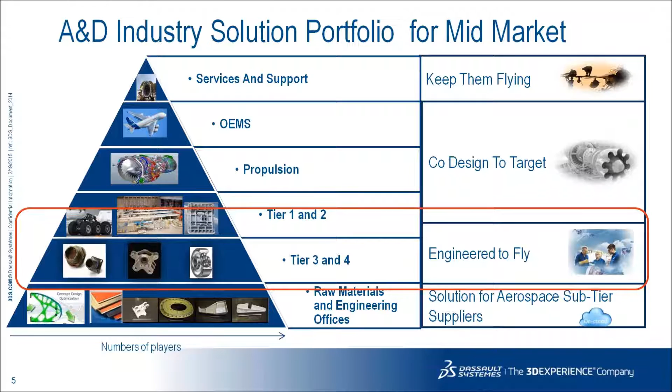To set the premise of where we feel this solution fits, it's really some of the Tier 1 and Tier 2 suppliers, and some of the Tier 3 and Tier 4, and even sometimes a little bit beyond that, depending on the interaction that you have with those tiers. That's our sweet spot that this solution has been developed for.

So why did we go and develop that? It's to address some of the technical challenges we're seeing as trends in the industry: basically more complex parts, going from metallic parts to composites, or from systems that are just pipes down to fluidics and electronics involved, or more importantly, even delivering integrated systems. It's not just piece parts and components anymore, but integrated solutions with sensors and reactions and various different components in that capacity, as well as business pressure on these tiers or suppliers into the supply chain about pressures in the global business market.

There's consolidation, there's mergers and acquisitions that are trending in our industry. There's the attitude of risk sharing from the OEMs - it's not just satisfactory anymore to simply participate from a transactional relationship; they actually want you to be a risk-sharing partner, and then be able to survive the ups and downs of the trends, managing the rate and demands on production, being able to take advantage of that when the opportunity should arise.

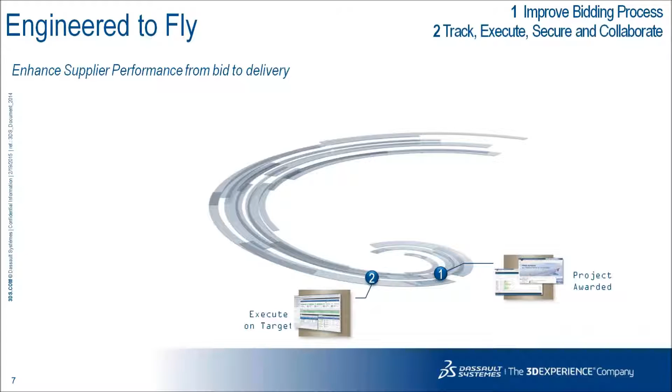So again, describing this a little bit more, how do we do that? One, we're going to work on improving the bidding process - standardizing on the bidding process, how to react to the bidding process, and that's part of this solution. Also executing on target, so on time and on budget for our projects, as well as integrated value streams, whether it's composites or machine components or systems and equipment.

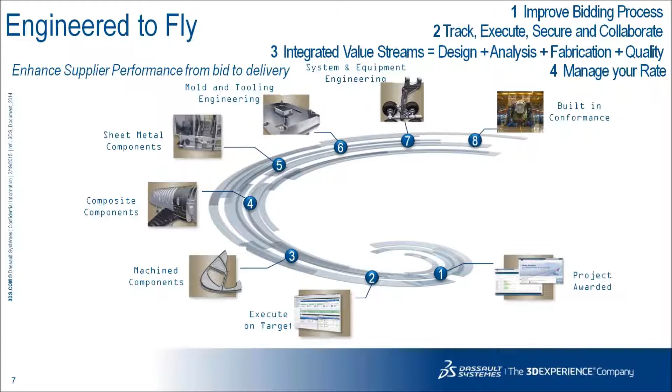And then finally, the validation of this so that you are traceable and auditable and have that built-in conformance at the end. So the solution is designed to basically cover those specific areas.

So uniquely, what does that offer? When we talk about items like digital continuity, what we're talking about is all working on the same architecture, having the same access to that data from design through manufacturing, so that we can run the proper simulations and understand the impact results.

Driven and controlled execution, where we're providing the standardized method for the routes as well as the traceability for your OEMs when we're executing on the project, as well as the operational efficiency gains we're promoting, which is really the reuse of RFP results, various risks and opportunities, and a templatized approach where we're not reinventing the wheel each time. We're using standardized templates to help accelerate our overall efficiency.

So with that, I will present a demo synopsis or scenario here that's really in 4 different stages, and we'll try to break that up a little bit so it's not just one continuous flow, so you understand these various areas and impacts throughout the presentation.

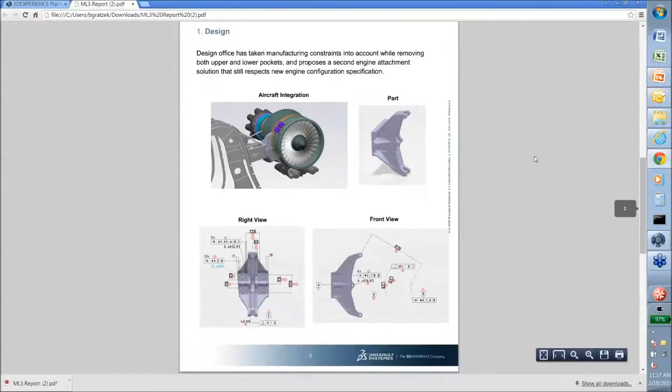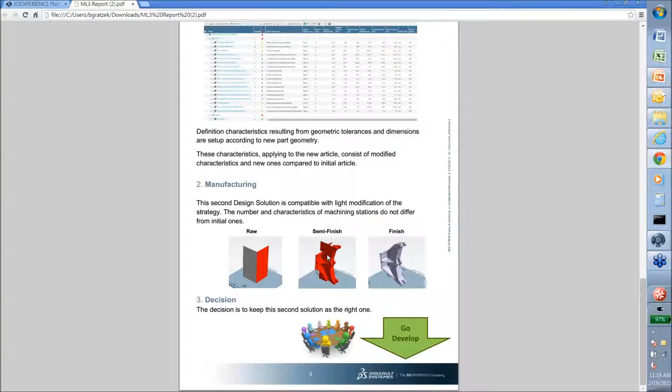So I'm looking under the folder that is the RFP requirements, and you'll notice that I have a written specification here. Let's go ahead and take a look at what that specification is. It talks about the engine attachment, the part that we're responsible for, the design, a couple different views, the tasks associated to it, and the different options for manufacturing that we have. This is part of the RFP. They want to change the mounting design on this particular part, and we're going to go ahead and investigate that.

So potentially we've got something we need to respond to in an RFP, and I could email that out and send it throughout the organization and have it get lost, or maybe not attended to, or maybe not tracked. But what we're going to do is show the 3D Experience and Engineered to Fly approach to how we respond to an RFP.

So as a program manager, I've made this available in this folder, and the manufacturing engineer has been notified through the workflow that they need to participate on that particular RFP. So I'm going to switch hats and switch roles, and I'm going to go from a project manager now to a manufacturing engineer.

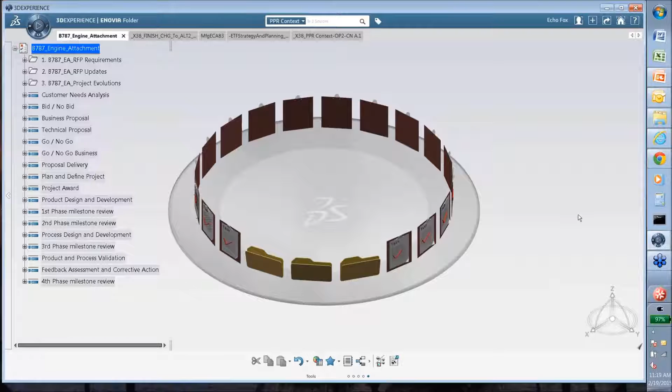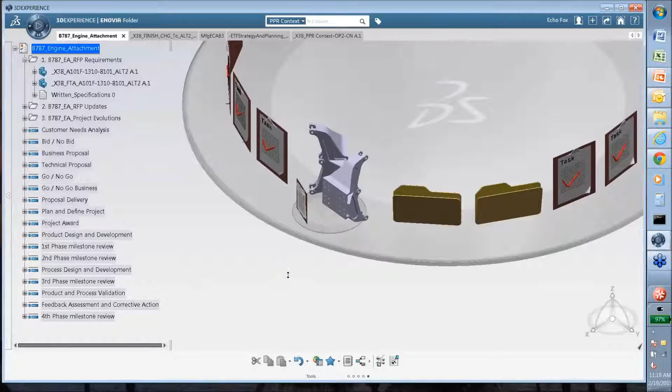That exact same view that I just had in the web browser with the 3D Experience is now mimicked here on the thick client for the manufacturing engineer, and in fact it's exactly the same information. I've got the project information, I've got the folders, I've got each stage gate and review information per that stage gate. So I am able to see visually in 3D what was there in the web as 2D information.

So I'm participating in that project and RFP plan directly here. We'll take a look at the

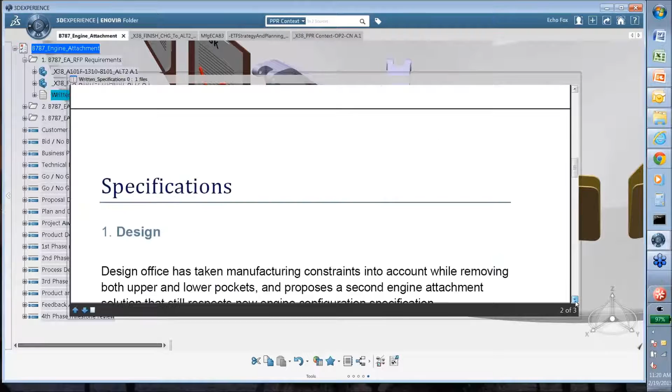requirements again. It's exactly the same document, one that we just reviewed from the web. So the same kind of look and feel is present both in the thick client as well as the thin client.

The compass is up here. So we're trying to get the synergy going between these two environments or interfaces.

So as I've looked at that document, I understand what I'm tasked with. I'm going to review the information that's here and take a look at the actual part that is in reference.

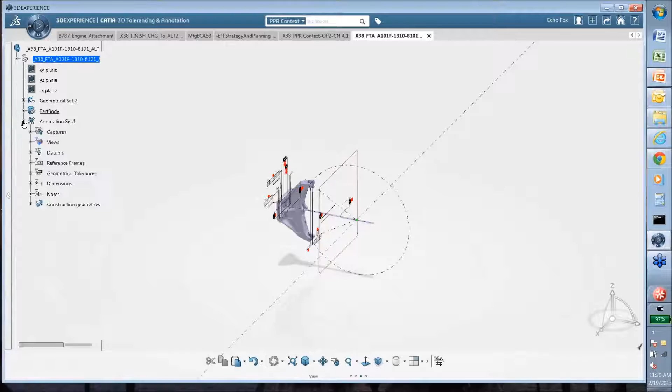And this, even though we interact with multiple CAD systems, I'm going to be working in Catia on the 3D experience. So this is the 3D experience and CAD or Catia at this point.

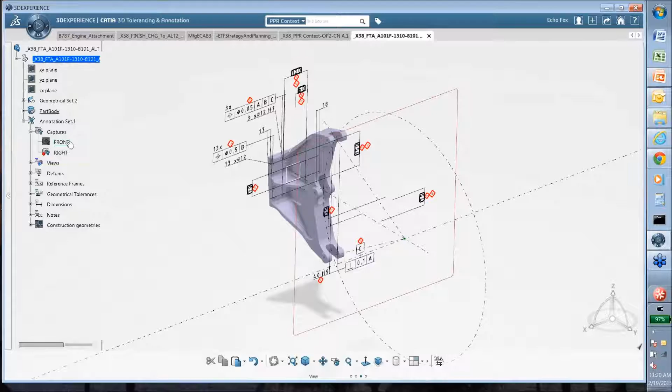So the same functionality, if you're used to this in V5, still exists. The displays of captures, which snaps us to a specific projected view and orientation, as well as displaying the various different tolerances that are there.

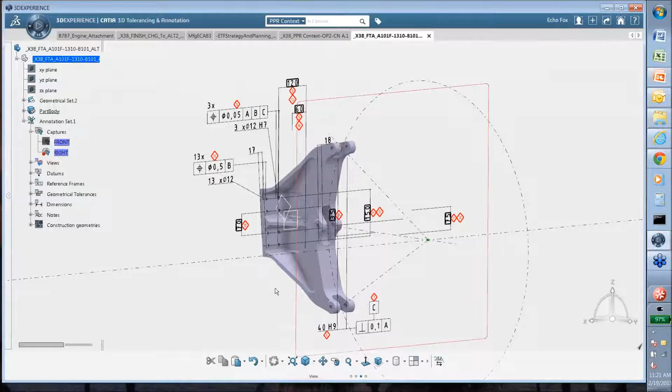This is very prevalent now in the aerospace industry to provide model-based definition where all the specs, the materials, the handling, the call-out is all identified directly on that particular part.

I'll also go explore just the geometry now of that part without the annotations. And what I'm really going to be looking for is anything that is similar to this part.

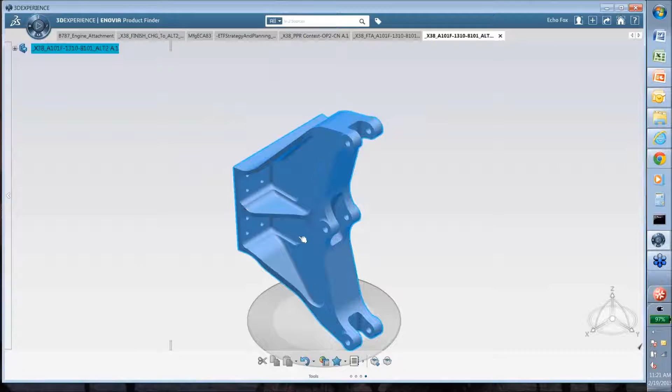So I'm the manufacturing engineer. The premise is going that I need to find out everything I can about this part. I'm looking at the information that has been provided, as well as I'm going to perform a similar search.

So I'm going to reuse any entries or items that I find that are valid inside my database to find out past projects, to find out components that may be relevant to what it is that I'm trying to accomplish.

So at any time I can go take a look at the properties of that particular item, find out the description or any kind of project that it was on, or if I want to, I can explore this with its parents, so I can find out what projects, what RFPs it has participated in the past, what machining operations were used on this particular part.

So as I go through, I'm trying to reuse the information within my database itself so that I can gain that efficiency when I'm responding to this RFP.

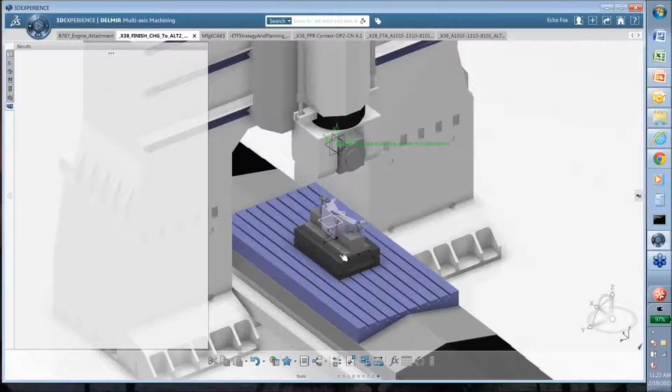So we'll take a look at the actual machining of the part as it stands now and investigate this a little bit further. So here's our part that is in the machining center, and it's our responsibility to find out everything that we can about this.

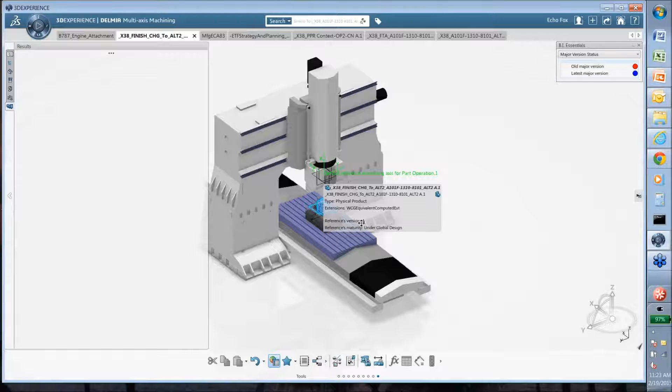And we take a look at that this part itself is actually an older revision. So we've got a revision A in there. With the B.I. Essentials overlay, I can find out very easily which part it is that is out of date.

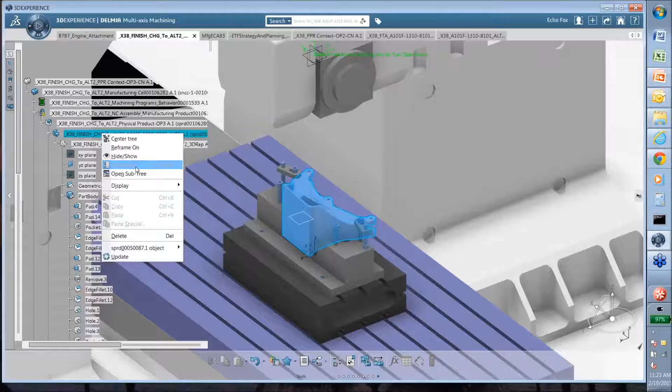The same items of capability that you're used to inside of Catia, where we can look at properties and center the graph, etc., exist inside of here. And I'm investigating this part to really find out what versions are available on this part.

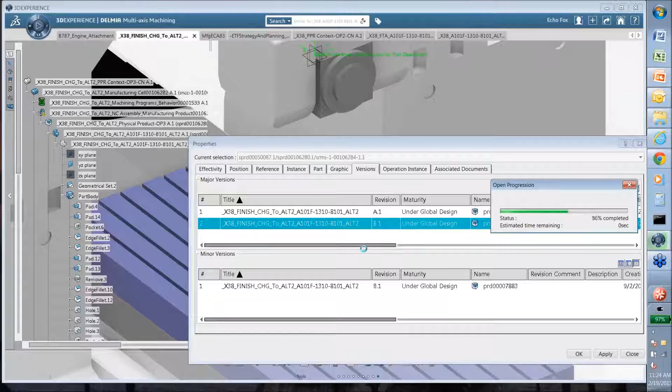There could be multiple versions on here. In this case, there's a version A and a version B. Let's go explore. Actually, let's just open this up and take a look at version B and try to determine exactly what's different between these two.

So I'm in investigation mode, manufacturing engineer, trying to figure out the differences between version 1 and version 2, or in this case version A and version B. I'm going to do a design review on this, and it's much like an assembly.

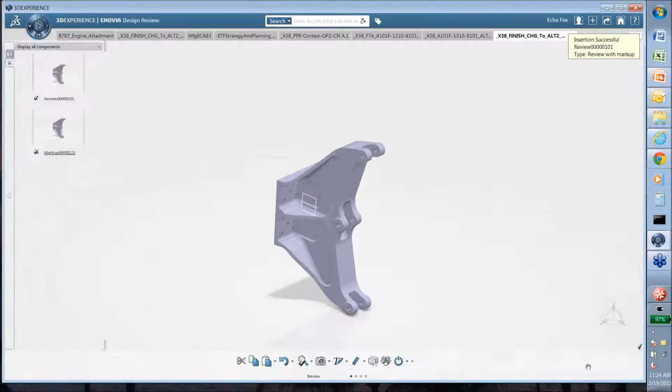We bring that part into the actual review, and then we can do various different tasks on it. And one of those tasks is really to compare it to anything, but the prior version would be nice to know.

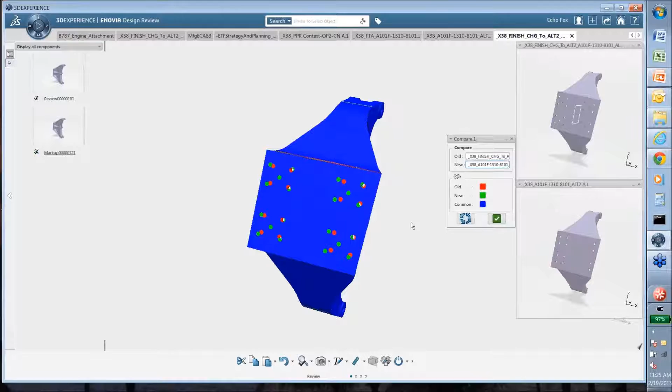So we take version A and version B, overlay them in this review session, and very quickly determine what is different between one version and the next. So you can see that the old pattern is a 4x4 pattern, and the new pattern is a 5x4 pattern as far as the holes or the mounting items are concerned here in the back.

Everything else, we get a little bit of a bleed through, especially with the go-to meeting, but everything else in blue is common with those.

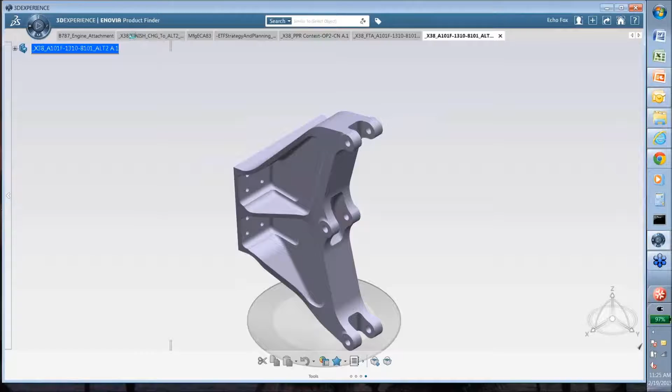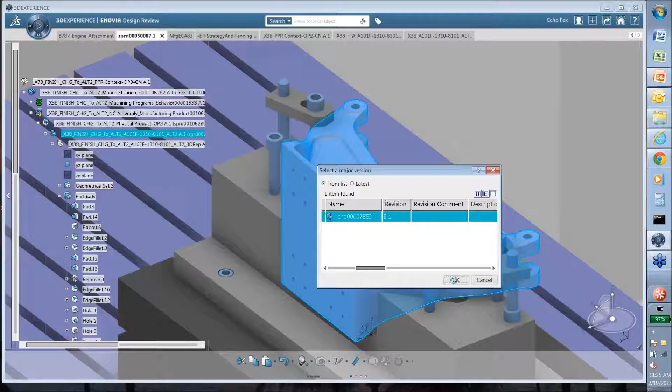So let's take a look at that manufacturing operation again, and notice that the older part, the 4x4, is still in here. I'll bring up our assembly tree, and we're going to go ahead and simply replace this with the latest revision. So as the manufacturing engineer, what I'm trying to determine is: is this still going to be valid when I replace this part? Is this feasible? Can we do this? Do we have the capability? That's really the intent, for me to investigate this.

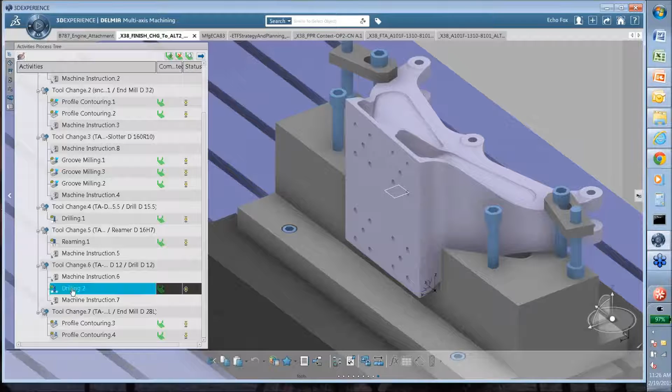To go to the fullest extent, I'm going to go into our manufacturing operation and make sure that we can actually manufacture with the new requirement. Because of the change, we're going to go into the drilling routine. Of course, I would have to update everything that has changed about the part. So I'm going to go add the hole pattern for the new center points, and then we'll validate that that tool path actually works.

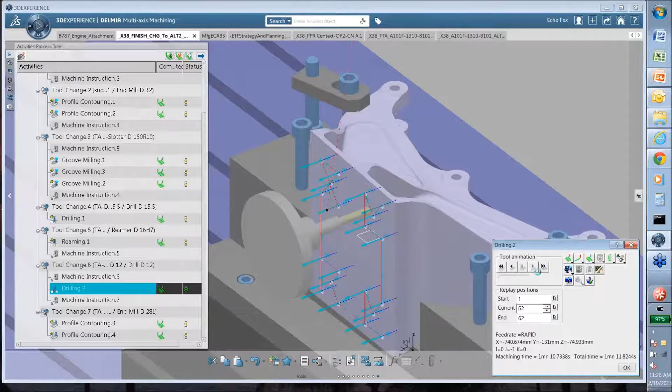This is part of that digital continuity. This is part of being able to always work on the same data set, being able to validate, being able to verify exactly what is happening with that data.

Quick little change—we like that progression. The other item you'll notice is that we've changed the part, so what we also want to validate is the fact that on our manufacturing program, all of the tool paths are actually going to be able to be updated properly so that I can submit that information.

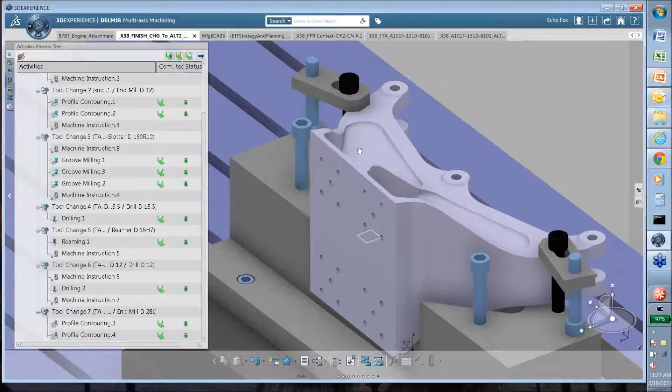So at this point, we've replaced a revision of a part. I've investigated exactly what needs to happen. I can now respond to the RFP in whatever format is required within the workflow, whether I'm submitting a work instruction or replying to a workflow and approving it, whatever that might be. We're going to investigate that a little bit later in the presentation. So at this point, we've kind of gone through stage one.

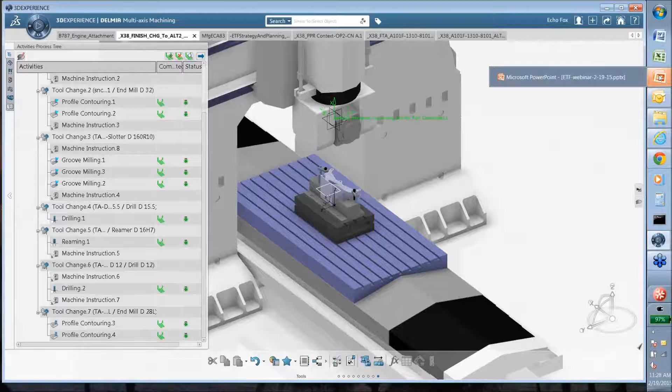Let's go back to our PowerPoint. So that was a little bit on the bidding process, the control, and being able to share information all the way from sales to the technical departments.

When we talk about the governance associated with this in the next step of the presentation, we're talking about getting an understanding of the data, the bid process, being able to manage resources from a single location, the approval process, the deliverables that are required, and then the ability to communicate the appropriate documents on a regular basis to the authority or to the OEM. So let's take a look at how we might do that.

I'm going to head to our home page, and as we mentioned, we have multiple programs that we're working on, whether it be the X38, the 737, or the 787. This time we'll talk about the key performance indicators with regard to a specific program, pending task timelines, pending deliverables.

If I want to know what the pending tasks are for the jack that we have that we're working on, I can immediately get that. If I just want to see across all of the projects how many tasks are actually overdue, no matter what project they're from, but all from the same program, I get a snapshot of that. If I go to the pending deliverables, it'll let me know which documents are still waiting, which ones are pending, and which ones I need activity on.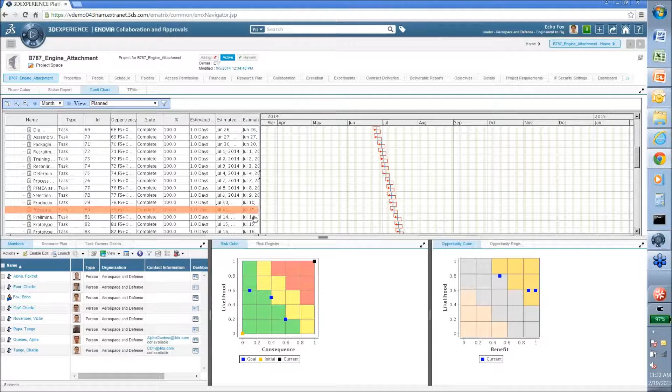And we can take a look at the Gantt chart associated to that. These are the various tasks that we have, and again this came from a templatized version of the APQP. If you have something different, we can certainly import that and use it. This is the Gantt chart of all the tasks responsible to go through that particular session or information associated to each phase gate, so we know we're addressing them appropriately.

Let's take a look at some of the other information here. We've got users collaborating on this particular project, and various different tasks assigned to users. Here, our user Echo Fox has certain responsibilities. We can dive down into the tasks assigned to that particular user, whether they are behind or ahead of schedule, how many tasks, and how much task accuracy they have in addressing the items they are responsible for.

We'll bring that control panel for the users down. We can also manage more specifically the access permissions. On this particular project, we have multiple folders and various different participants - they may be outside customers, vendors, suppliers, or employees. We can give inherited rights, meaning whatever the default was set up on the folder gets broadcast to the users. Or we can set specific rights as far as their access - whether they have read, write, add, remove, or none. Maybe that user is outside our company and we don't want them knowing about a particular task, project, or RFP we're responding to.

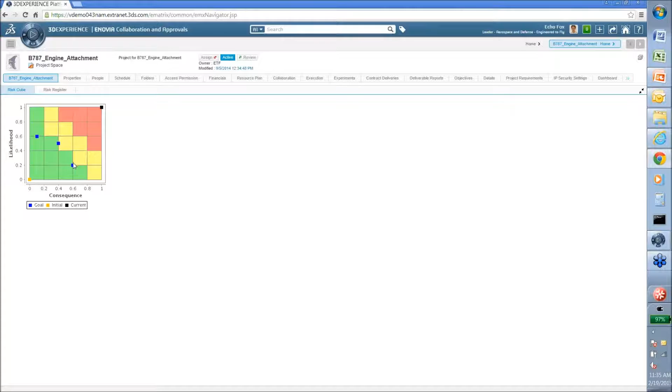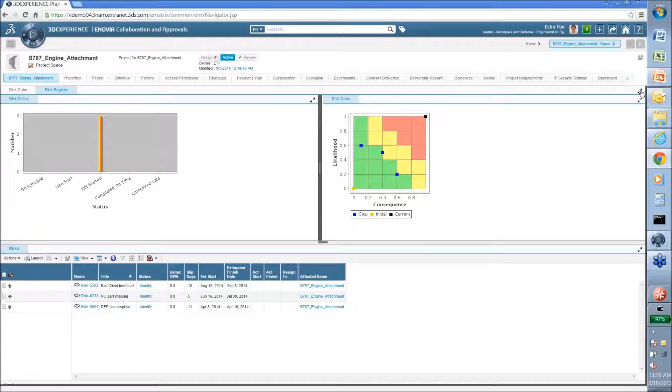So we can control the access permissions here. We've talked about the stage gate process and how that's tracked. The other one to broadcast here is our risk management. We have a risk cube, which manages the various risks associated with a particular project. Often these risks are broadcast up to the C-level of an organization so you can manage them - what is the status of the risks, what is the mitigation process you'll put in place, what is the likelihood and consequence of that risk. When we track and manage these items, it gives us the ability to share that from project to project and gain from that experience.

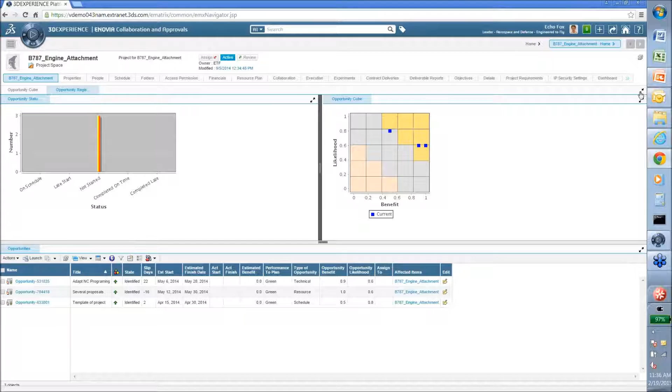Not only is there risk management, but there's also opportunity management within here. What are the potentials for our opportunities? Maybe it's a new process we can start to employ, and what would the benefit of that process enable? So what this allows you to do when talking about risk and opportunity management is increase your bid-win ratio as well as make you more profitable on the bids that you do win.

So that's a little bit of the snapshot of the governance that's also associated to a particular project. We'll continue on with our presentation and take a look at the third stage here.

Jason, I believe we have another poll. That is correct, so I'm going to launch another question here that will be open for about 30 seconds as well - how many civil aircraft are produced in a year worldwide? Interested in the responses on this one.

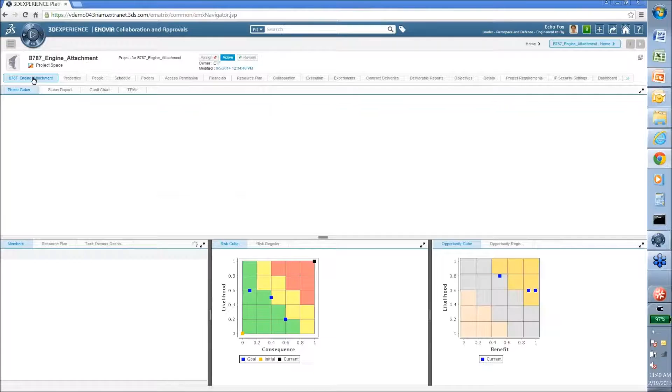So at this point, I'm going to go and schedule this. We've seen the Gantt chart of all of these tasks as we've gone through our phase gates. Let's just look at the last one with the feedback and corrective actions, and pull up the specified tasks associated to that particular block in our workflow.

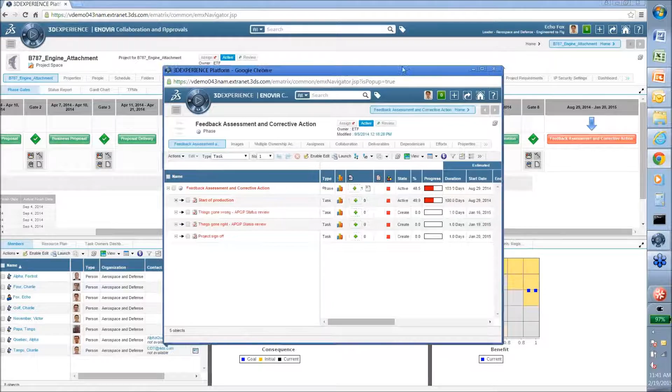So as we look at the start of production, the delivery rate requirement change has been broadcast, and we've made a task that is associated to that and assigned to a particular person.

So I can, of course, link items to that task that we've created. We'll take a look at this. So we're trying to now schedule this particular rate change requirement or proposal from our customer.

Currently, it's under review. It does go through a workflow process on whether or not we can handle this particular delivery rate change from 40 to 60 per month.

In order to investigate that change further, we've also created another task, which is a delivery rate change, and for that, we've created a manufacturing change action.

So when I take a look at the manufacturing change action, this is a gathering location for us to put the pertinent information about what we need to investigate to see if we can incorporate this actual change, as well as gives us a forum for tracking and having traceability to the value or results of that particular investigation.

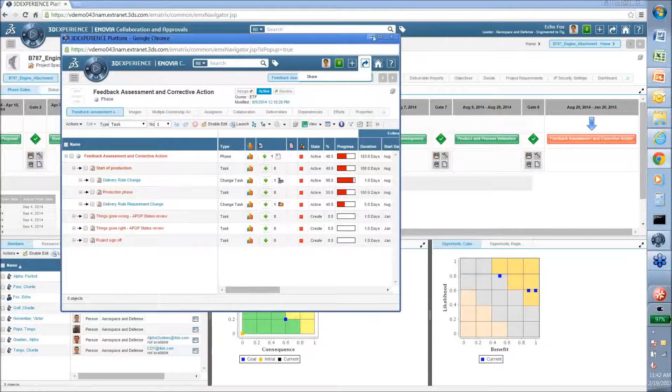So I've got this manufacturing change action that's here. It has been assigned to the manufacturing engineer. Let's go take a look at the manufacturing engineer's response to that particular change request.

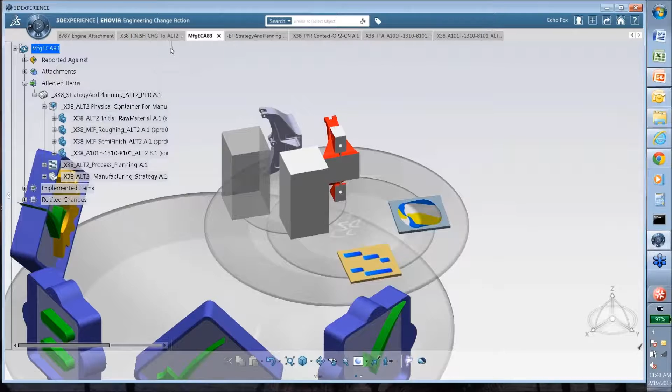So the icons match. We are again getting the capability of seeing that we're all working on the same architecture and the same database. I have the manufacturing change action broadcast to me. I can see which affected items are actually here and what specific manufacturing processes it is that I need to account for when they're talking about a rate change on this particular part.

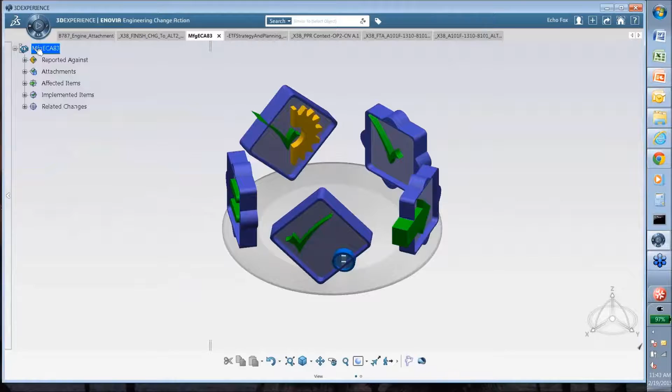So we've got a manufacturing process here that I need to investigate. That information is delivered to me. It's all combined into one manufacturing change action, and I will investigate exactly how we are currently doing this. This is the current process that we use, and it's a little bit simplified for our demonstration here, but we're delivering the raw material.

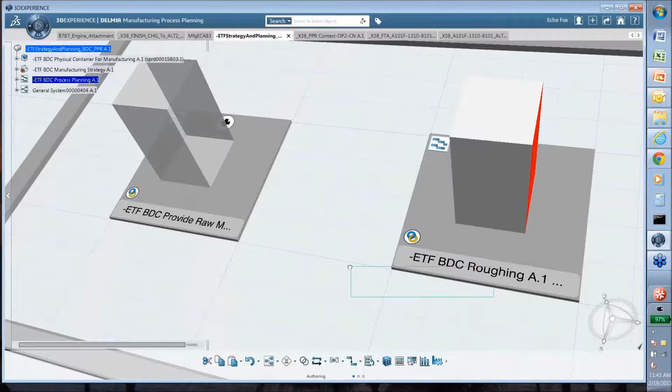How we actually make this is that we go through a roughing stage to bring it down to size. We do a semi-finish operation, and then finally we're doing a finish operation on that particular part. So though there may be a machine tool that is capable of doing all of those, really this is multiple subsystems that are delivering this.

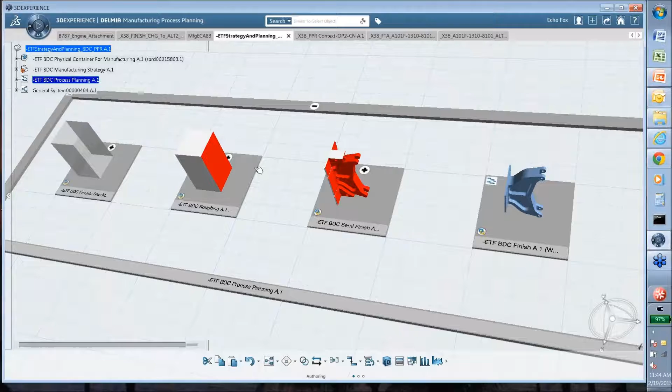Take this example and maybe replace it with an assembly example where you have different substations putting parts together, or different machine tools doing different operations, which is the case right here for how we're addressing the manufacturing of this particular part.

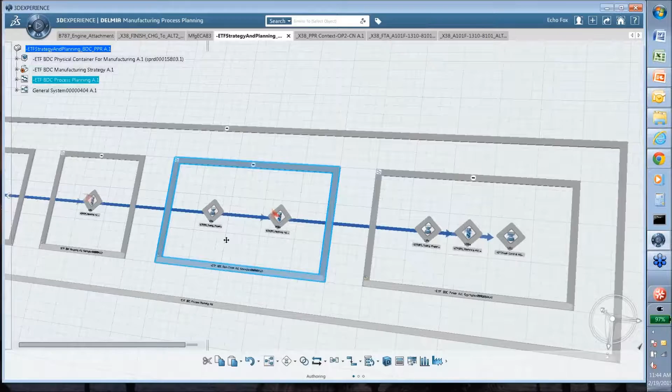As I look under each one of these components, they're broken out into their operations that are assigned to each one of these subsystems. Some subsystems have more than one operation associated to them and what they're responsible for in the overall manufacturing process. I can further investigate this by pulling up a Gantt chart of that particular process.

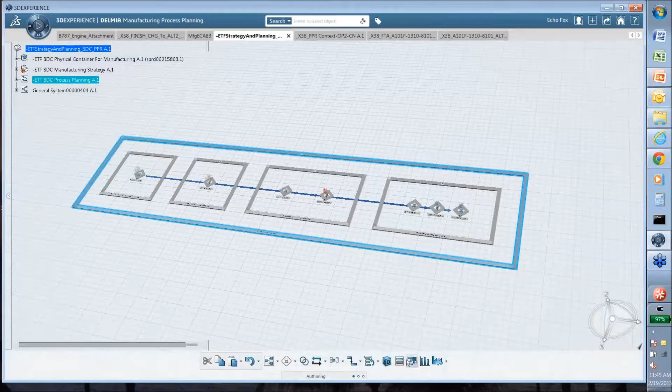As I take a look at that Gantt chart, what we have are each of the subsystems and their associated operations that exist on that particular subsystem.

So what I'm trying to figure out is how do I increase the rate in the overall production capacity that we have. As I look at this, I'm looking at how to basically figure out when the next cycle is actually going to start. As I duplicate this process, I'm trying to figure out when I can release this next part into the system and figure out the utilization of each one of these subsystems that are there.

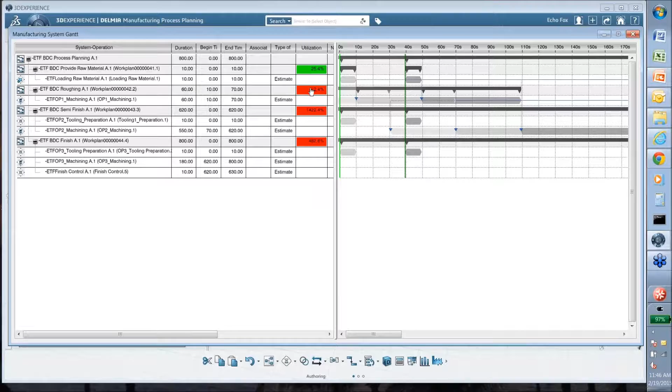As I drag this across, what we're seeing is that the first stage or subsystem is basically under 100% capacity. That's why it's showing up in green, so we can handle that rate. But then we hit the next subsystem, which is over capacity, at 150%.

As I drag that out, we're noticing that now I'm below 100, but when we get to the third subsystem, I'm still not where I need to be able to handle any kind of rate increase at that level. So I continue to simulate what it would be and what time frame I need to put this out at in order to be able to handle a certain release rate of those parts down to the shop floor.

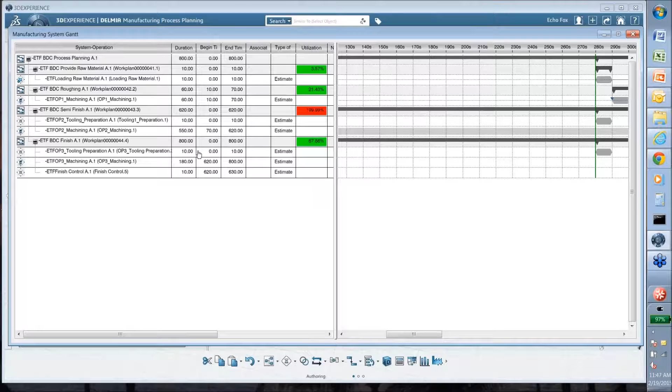So 3 out of the 4 subsystems are able to handle this capacity, and you notice that the third subsystem is basically at this time frame at about 200% capacity.

So as the manufacturing engineer, I have a decision to make. If I have another subsystem which is exactly capable of handling these operations, I could put 2 of those machine tools, if that was a machine tool, onto this to handle 100% of the capacity and continue to keep my workflow going at this particular rate.

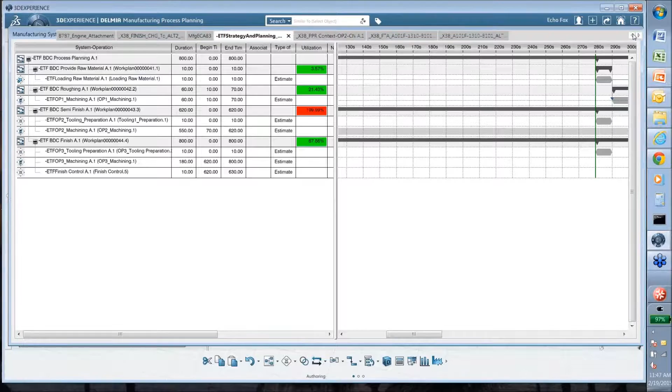The other item that I could do is to see if I can actually make this particular operation more efficient somehow. So we get various different simulation capabilities with the process planning, as well as the capability to use this digital continuity to investigate further what exactly it is that we are trying to optimize.

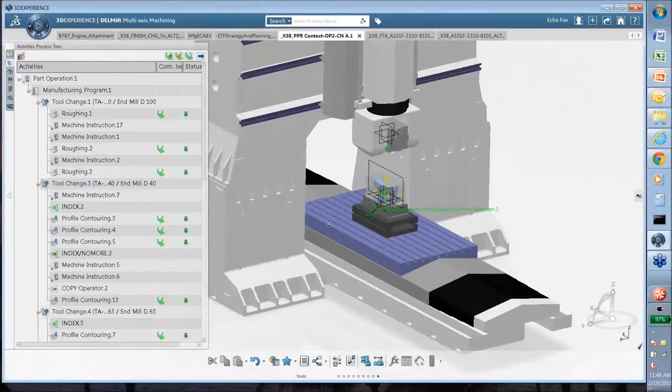So here's the part in the manufacturing process, and we're going to see if we can modify anything in here as the manufacturing engineer to make this more of an optimized approach to our particular manufacturing operation.

As I investigate this, I'm looking at various different tool paths and manufacturing approaches here. One of the options that I see I have not employed is basically a high-speed milling approach.

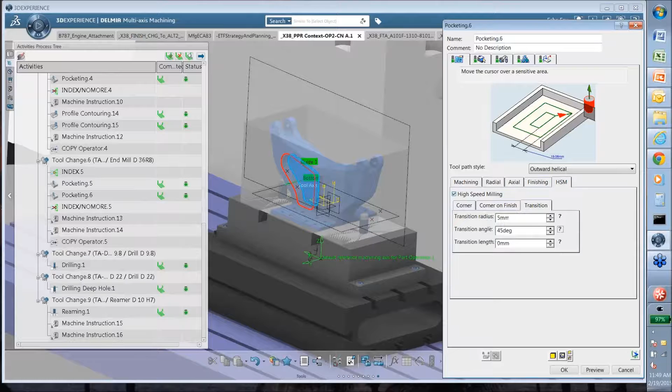This is a good candidate for it for pockets, and I'm going to investigate what it would take to basically introduce high-speed milling to this particular operation. We'll do that for both the transition and the corners. And I will validate that result by doing a simulation of the actual tool path.

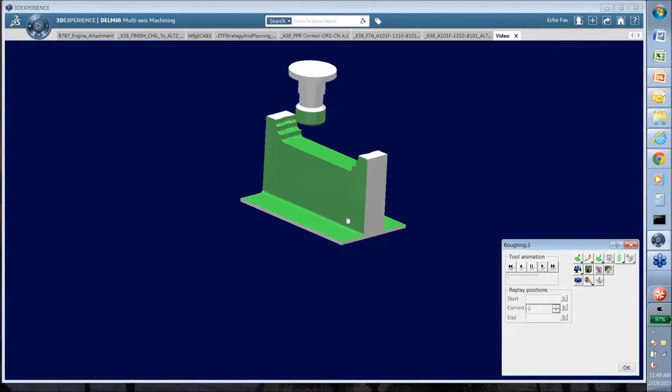Of course my work wouldn't be done on just one of the tool paths. I would see if there's any feed rates that I could optimize as we go through. I'm reviewing the tool path, making sure that everything is still corresponding and operating as expected. And then I'm paying attention to the pocketing routines, which I have just now employed a high-speed milling approach to.

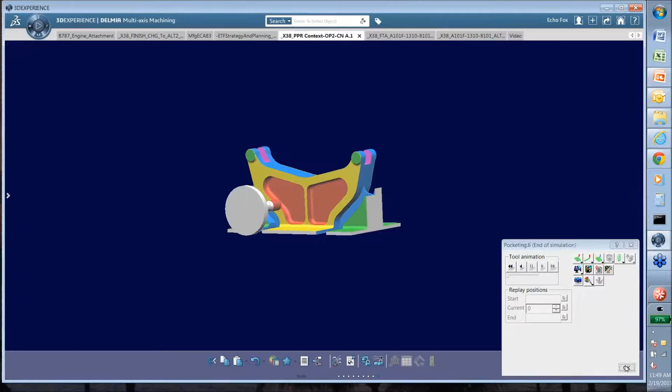So for demonstration purposes, again, what I would be doing is investigating all of these, making sure that we could try to increase rate that way. You'll notice that part of my responsibility is also to make sure that any changes are valid changes. So I'll go back to my manufacturing program and update that program.

So part of my responsibility to do that, as well as prepare some of the deliverables that I have that are a requirement from the manufacturer. Remember, this is in production, so any changes to this need to be documented. Maybe I actually need to execute and put out the NC code and the APT source file to let everyone know and manage the new G code that's going down to the machine.

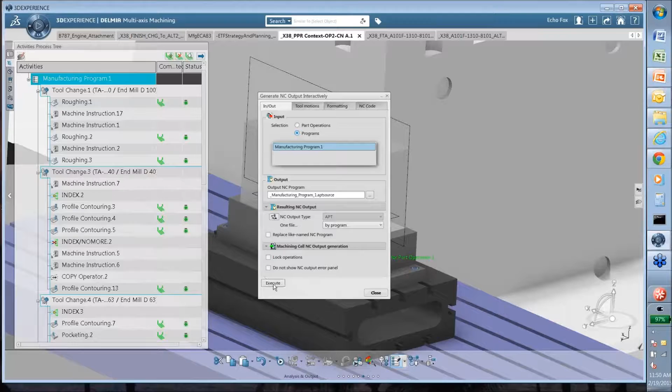So if I would execute this, we would actually broadcast that information out. So very quickly, as I notice I'm running close to the end of the time frame, we're going to take a look at the last step here. And that's really the support for the audit and quality, and that would be the reporting of this information into one location that is manageable, traceable, and can provide the details for the audit.

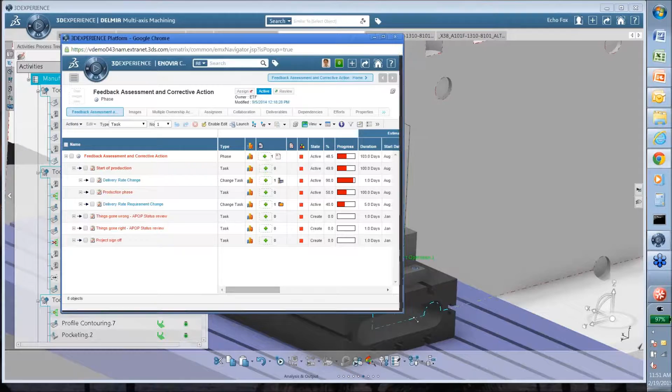So as the manufacturing engineer, I'm responsible for participation in this delivery rate change. I've just investigated it, and I found that we do have a satisfactory answer in this case, so I can pull up that manufacturing change action and participate in the workflow. We're going through this fairly quickly. There would be approvals and sign-offs and requirements, but if I put this to complete and I had the permissions to put this to complete, what this is actually doing is recording the fact that I have investigated it. It is a completed task, and it's allowed to go into the database and record that information.

So instantly, once that's done, it is broadcast out to the schedule, and we get an instantaneous result to the overall accounting system for this. I'm going to let that continue and also go to the other portion of this, which is our folders.

And under the folders, we have our quality area, which is also providing the details for the audit. Inside that engine attachment delivery rate change, what we have is the ability to basically track and manage the files that are associated with any of these changes, much like we would manage our CAD systems and our CAD files. So, you know, my responsibility would be for whatever workflow or for whatever machining operation that I have, I would upload that file and broadcast that and present that and bring that to put it into the quality document area.